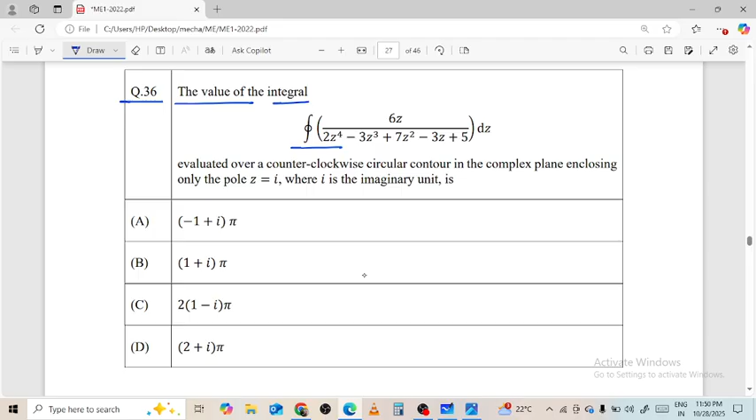ये रहा गेट 2022। The value of the integral, cyclic integral over 6z, 2z^4 minus 3z cube plus 7z square minus 3z plus 5 dz, evaluated over a counterclockwise circular contour in the complex plane enclosing the pole, of z is equal to I, an imaginary unit.

So shall we proceed and go ahead? Here we have the equation in the form of f(z), which is given that 2z^4 minus 3z cube plus 7z square minus 3z plus 5. That is the equation. Put the value over here, which is z is equal to I.

So f of I value is 2 times of I raised to power 4 minus 3I cube plus 7 times of I square minus 3 times of I plus 5. After calculating this, we get 2 plus 3I minus 7 minus 3I plus 5. The whole value is equated to 0, क्योंकि दो सब जो है कट पड़ जाएगा, 7, 5, 2, 7, which tends to be 0.

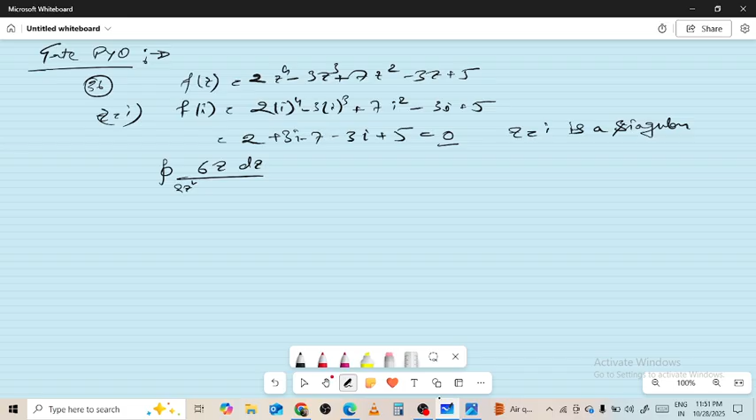तो एट z इज इक्वल टू I पे हमें फंक्शन कैसा प्राप्त होता है, इज अ सिंगुलर फंक्शन। Now we have the equations over cyclic integral over 6z dz upon 2z^4 minus 3z cube plus 7z square minus 3z plus 5, which is multiplied with 2 pi I over residue z is equal to I over here.

Now moving ahead, for this rule we have multiplied with the zi over here on that particular node. So residue over z is equal to I is equal to limit z tends to I, 6z divided over 2z^4 minus 3z cube plus 7z square minus 3z plus 5.

तो अभी अगर z इज इक्वल टू आई रखते हैं तो 0/0 फॉर्म होगा। तो हम यहाँ पे अप्लाई कर देंगे एल हॉस्पिटल्स रूल।

We have to apply L'Hopital's rule on the equation over here. z tends to I, 6z square minus 6zi over division 8z cube minus 9z square plus 14z minus 3.

Put the value over z is equal to I over here. Put the limit, 12I minus 6I division over 8I cube minus 9I square plus 14I minus 3. So after this we get the value, putting I upon 1 plus I.

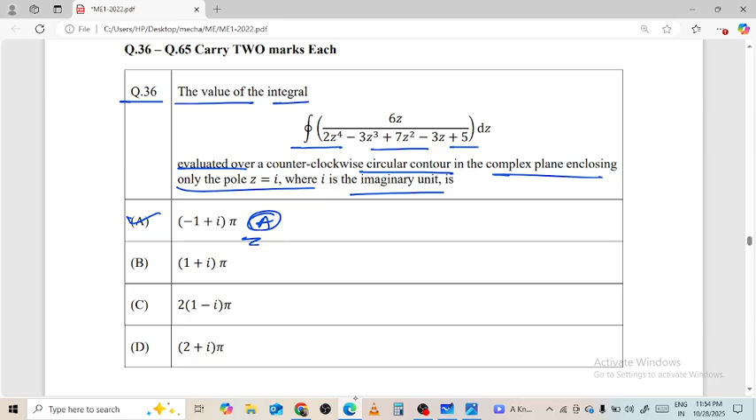Okay, so which of the choice is to be true over here? It's option alpha, right? Imaginary unit का बोल रहा है on that particular case over here।

Now moving ahead for the next question, easy peasy। Here the section दिया हुआ है, उस पे एक point load एक्सियल डायरेक्शन में लग रहा है। Let's consider an L-shaped elastic member ABC with slender arms AB and BC। ये जो आपका शेप दिख रही है बार की, वो उसी की बात कर रहा है। Uniform cross section is clamped at end A and connected to a pin at end C।

The pin remains in continuous contact and is constrained to move in a smooth horizontal slot। The section modulus of the member is same in both arms। The end C is subjected to a horizontal force P, and all deflections are in the plane of the figure। Given that the length AB is 4A and BC is A, the magnitude and direction of normal force on the pin from the slot respectively are, which of these is true over here?

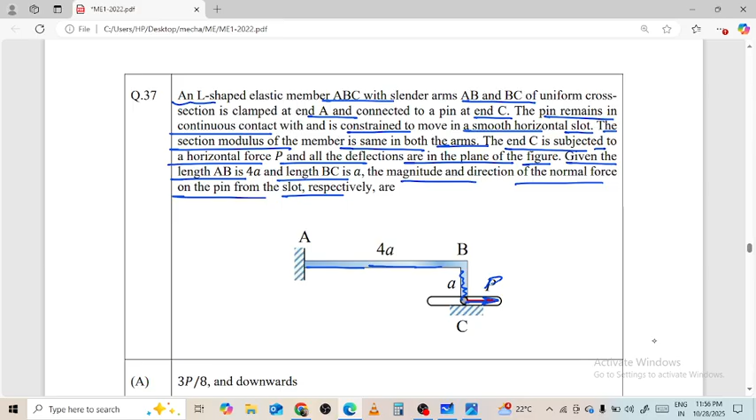अब हमको पता है कि एक फोर्स आएगा, एक लोड आएगा, फोर्स और लोड का ही कॉम्बिनेशन आपको चेक करना है। यहाँ पे नॉर्मली आपका एक्सियल लोड क्या लग रहा है P, और वर्टिकल कौन सा फोर्स F लग रहा है। ऑलराइट, नाउ मूविंग अहेड फॉर दिस।

अगर हम इसे शिफ्ट करके अपने बीम के ऊपर लेके आते हैं, तो अगर मुझे कैंटिलीवर बनाना है तो यहाँ पे एक पॉइंट लोड शिफ्ट करेंगे तो एक फोर्स के साथ मोमेंट भी दिखेगा, जो कि एक pa डिस्टेंस पे होगा। फोर्स को शिफ्ट करते हैं तो एक लोड और एक मोमेंट आता है।

नाउ ऑन दैट पर्टिकुलर नोड अगर मैं डिफ्लेक्शन कैलकुलेट करता हूँ, तो डेल वन इज इक्वल टू पॉइंट लोड के कारण, यहाँ पे Pa4 square upon 2EI कंसिडर एज अ मोमेंट के कारण। यहाँ पे हमें प्राप्त होता है 8Pa cube upon EI, और डेल टू अगर मैं डिफ्लेक्शन कैलकुलेट करता हूँ द पॉइंट लोड के कारण, तो मुझे प्राप्त होता है F times of 4a cube upon 3EI, which is to be 64Fa cube by 3EI.

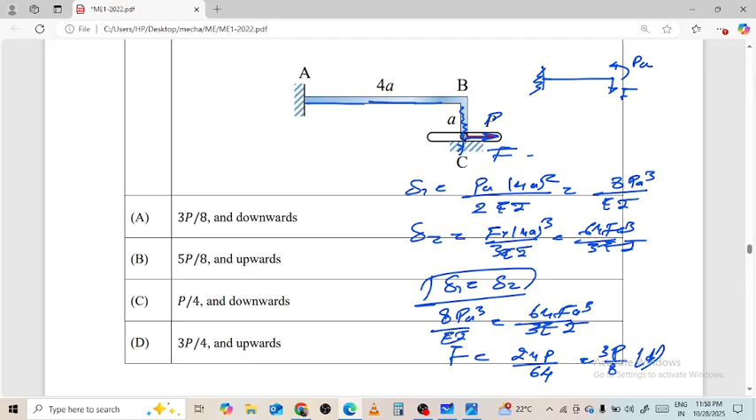Now I will go ahead with equations, is to be completely balanced. So point load जो है moment को balance कर रहा है on that particular node. 8Pa cube by EI is equal to 64Fa cube over 3EI. The final value we get for F is equal to 24P by 64, which is to be 3 times of P by 8. The action is to be in a downward direction. Option A is the right choice for this.

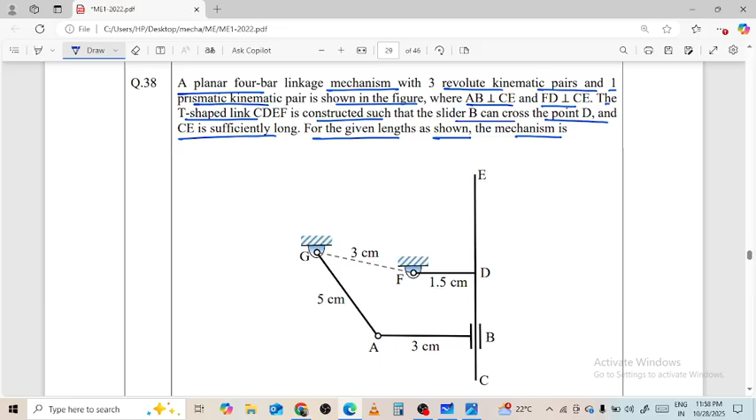Alpha. Now moving ahead for the next question. Here we have a planar 4 bar linkage mechanism with 3 revolute kinematic pairs and 1 prismatic kinematic pair as shown in figure. AB is perpendicular to CE and FD is perpendicular to CE. The T-shaped link CDEF is constructed such that slider B can cross point D, and CE is sufficiently long for the given length as shown. The mechanism has lengths 3, 5 centimeter, 1.5 and 3.

अगर मैं यहाँ पे डायरेक्टली ग्रेशॉफ लॉ लगाता हूँ तो वहां से समझ में आ जाएगा कि चेन कैसी है आपके। यहाँ पे शॉर्टेस्ट लिंक की लेंथ 1.5 सेंटीमीटर, 5 सेंटीमीटर। शॉर्टेस्ट प्लस लॉन्गेस्ट 1.5 plus 5 is equal to 6.5। and the remaining two links is to be P plus Q, 3 plus 3 is 6।

तो यहाँ पे आपको शॉर्टेस्ट प्लस लॉन्गेस्ट जो है मोर देन p प्लस q दिख रहा है। So on that particular node, what we have is there's a non-Grashof chain with an oscillating link. So it's B, B is the right option for this. Now moving ahead for the next.

Here we have a question over here. Consider a single degree of freedom system governed by x double dot t plus 2 zeta omega n x dot t plus omega n square x t equal to omega n square cos omega t, where zeta and omega n are the damping ratio and undamped natural frequency of the system respectively, while omega is the forcing frequency.

Amplitude of the forced steady state response of this system is given by 1 minus r square whole square plus 2 zeta r whole square raised to power minus 1 by 2, where r is equal to omega by omega n. The peak amplitude for this response occurs at frequency omega equal to omega p. Omega d denotes the damped natural frequency of the system. Which of the following is true? Alpha, beta, Charlie and delta. कौन सा स्टेटमेंट आपका जस्टिफाइबल होगा वही आपको बताना है अकॉर्डिंग टू दैट।

ओके, सो लेट्स वी हैव टू मूव ओवर हियर। हमें पता है कि एम्पलीट्यूड क्या होता है, स्क्वायर रूट ओवर 1 माइनस ओमेगा बाई ओमेगा एन को r square से डिनोट किया गया है प्लस 2 zeta times r का whole square। ऑलराइट, सो यहाँ पे हमें damping is to be square root of 1 minus zeta square times of omega n, which is less than the value of omega n.

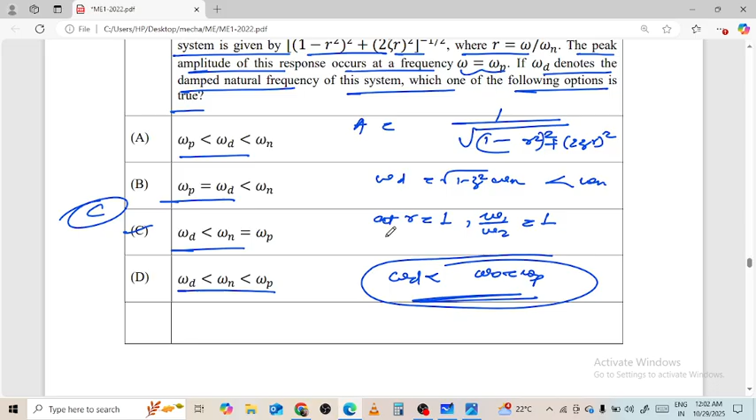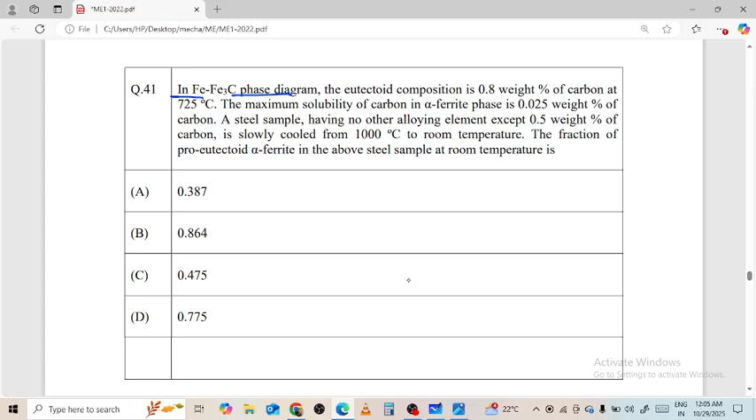Now moving ahead for the next question, a beautiful material science question. In an iron carbon phase diagram Fe-Fe3C, the eutectoid composition is 0.8% carbon at 725 degrees Celsius. Maximum solubility of carbon in alpha ferrite phase is 0.025 weight% carbon. A steel sample having no other alloying element except 0.5 weight% carbon, slowly cooled from 1000 degrees Celsius to room temperature.

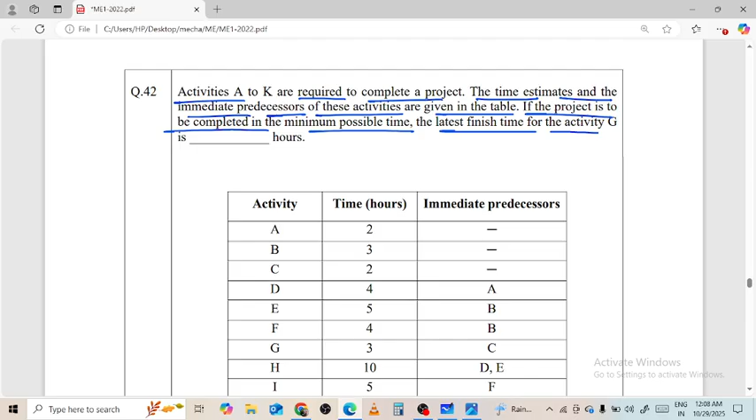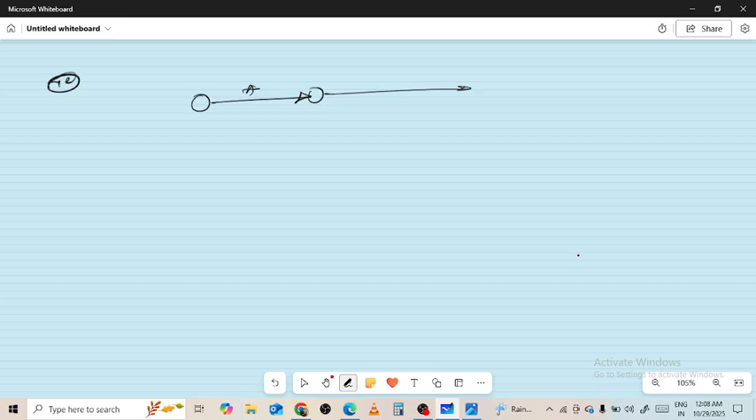So here we take a blank page for our question. The question number here is 42. We make sure activity A is moving, then it surpasses with A to D, Dehradun. Single node is the second activity B, and the third activity on this node is C.

Now moving ahead with the activity from the B point to activities E and F. It's E, and over it is F. Then F to I over here.

The activity over here is to be H. Now from C, the activity is to be G, and after G connecting the dots over here to be here. I is to be J. Now the final activity is to be K over here.

Alright, now putting the values over here. A is to be 2, B is to be 3, C is to be 2, D is to be 4, E is to be 5, F is to be 4, G is to be 3, H is to be 10, I is 5, J is to be 8, and K is to be 3.

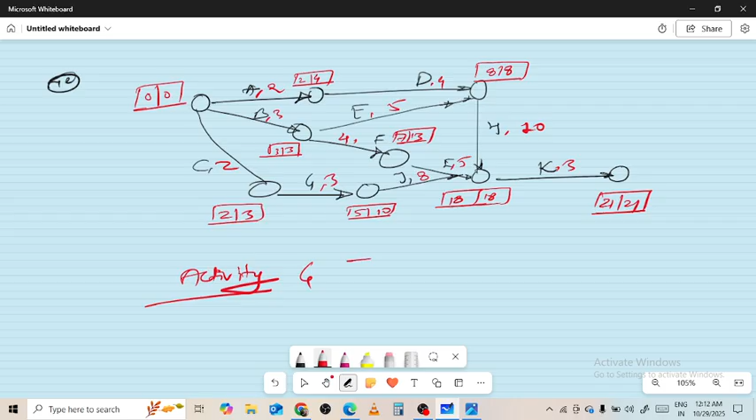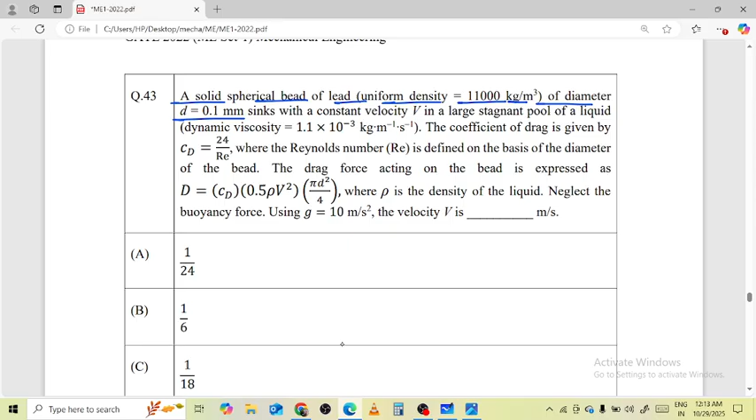The 43rd question states: a solid spherical bead of lead with uniform density equal to 11,000 kg per meter cube, of diameter D 0.1 millimeter, sinks with a constant velocity v in a large stagnant pool of liquid with dynamic viscosity 1.1 into 10 raised to power minus 3 kilogram per meter per second. Coefficient of drag is given by CD equals 24 by Reynolds, where the Reynolds number is defined on the basis of diameter of the bead. Drag force acting on the bead is expressed as D equals CD times 0.5 rho v square pi by 4 times D square, where rho is the density of liquid; neglect the buoyancy force. G is to be 10 meter per second square.

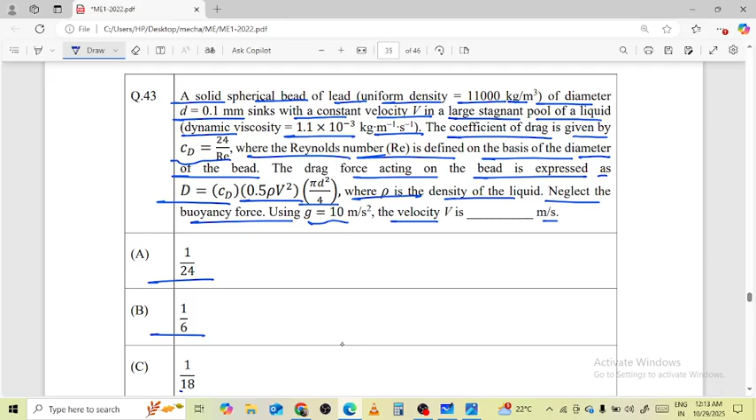We know Reynolds number is equal to rho v D upon mu. Putting the values over here: rho v, 0.1 into 10 raised to power minus 3 upon 1.1 into 10 raised to power minus 3. So Reynolds is equal to rho v upon 11.

Drag force on a sphere, which is to be CD times 0.5 times rho v square pi by 4 d square. Now putting the values for coefficient of drag: 24 upon rho v, by 11 into 0.5 rho v square into pi by 4 d square.

So the value of drag is to be 132 v pi by 4 times d square.

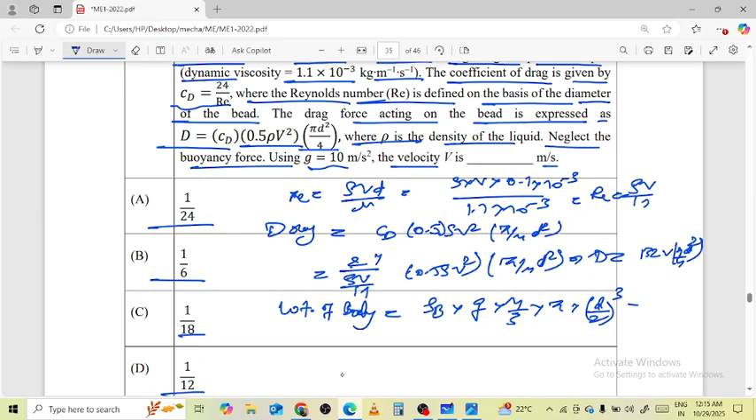Now for comparison, weight of body is equal to drag force, which is rho body g volume 4 by 3 pi r cube. On that note, net force on the body is to be 0 in the case of constant velocity. So comparing: 132v by 5 D square is equal to rho of body g, 4 third into pi D by 2 cubed.

Okay, now moving ahead for the next question over here.

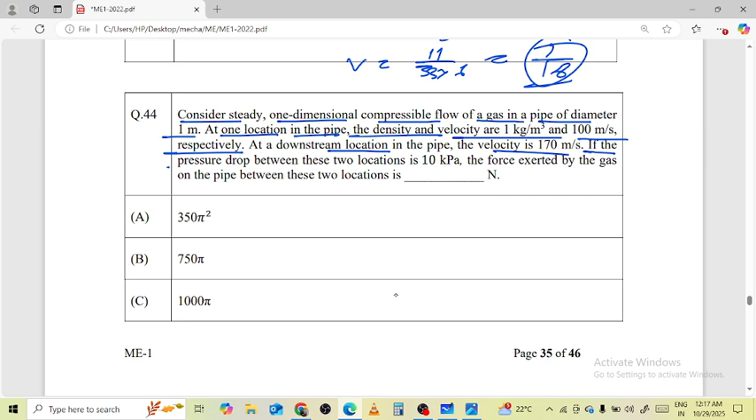Consider a steady one-dimensional compressible flow of a gas in a pipe of diameter 1 meter. At one location in the pipe, the density and velocity are 1 kg per meter cube and 100 meter per second respectively. At a downstream location in the pipe, velocity is 170 meter per second, and the pressure drop between these two locations is 10 kilopascal. Force exerted by the gas on the pipe between these two locations is in Newton: options are 350 pi square, 750 pi, 1000 pi, and 3000. Which of the options is true over here?

So let's make the diameter of the duct over here. Diameter is 1 meter, velocity v1 is 100 meters per second, and v2 is 170 meters per second. So we apply the momentum equation. There are two faces between them: this one going in, and this one going out. This is our section 1 to 2.

On that particular node we have P1 minus P2 times A, minus the force in the particular region, which is to be F.

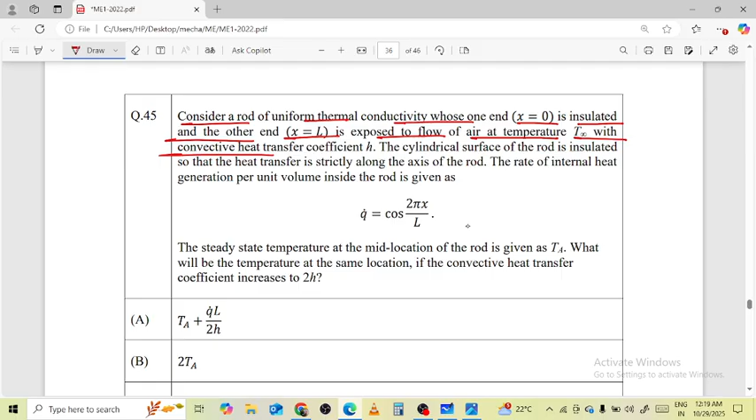Consider a rod of uniform thermal conductivity whose one end at x equals 0 is insulated and the other end at x equals L is exposed to flow of air at temperature T infinity with convective heat transfer coefficient H. The cylindrical surface of the rod is insulated so that heat transfer is strictly along the axis of the rod. Rate of internal heat generation per unit volume inside the rod is given as Q dot cos of 2 pi x by L. Steady state temperature at the mid location of the rod is given as Ta.

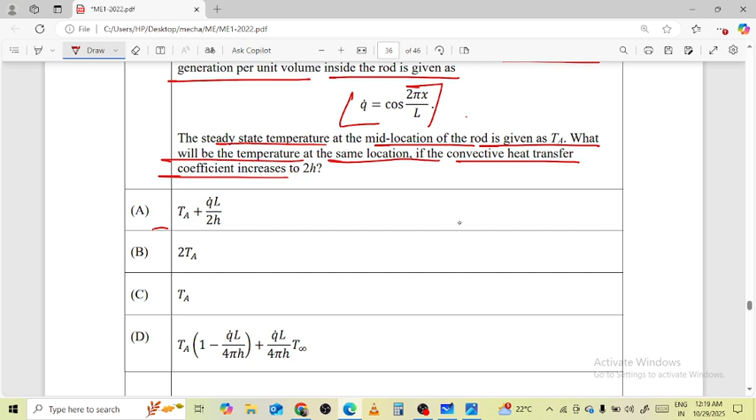What will be the temperature at the same location if the convective heat transfer coefficient increases to 2H? Options include Ta Q dot L by 2H, 2Ta, Ta times 1 minus Q dot L by 4 pi H, plus Q dot L by 4 pi H T infinity. So after solving, we have to get the complete equation as well as the scenario. Let's take a blank page for our calculation.

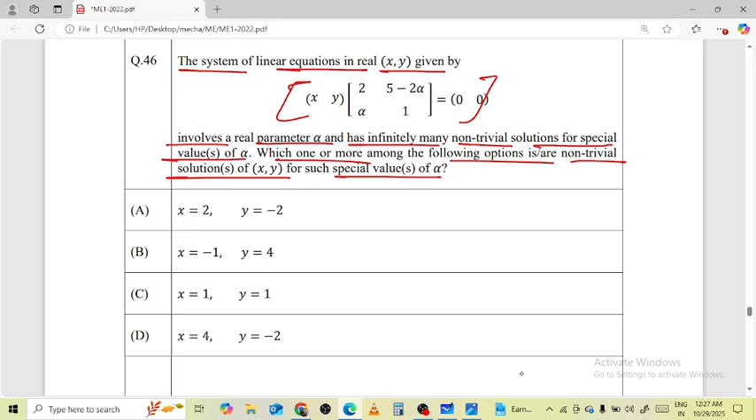So if it says non-trivial, the condition is determinant A is equal to 0. Put the value over here.

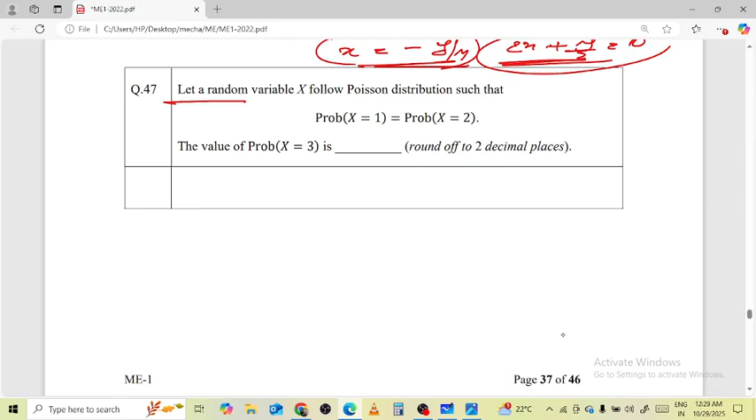Question number 47: let a random variable x follow the Poisson distribution such that probability x is equal to 1 is equal to probability x is equal to 2. The value of probability x is 3, round off to 2 decimal places.

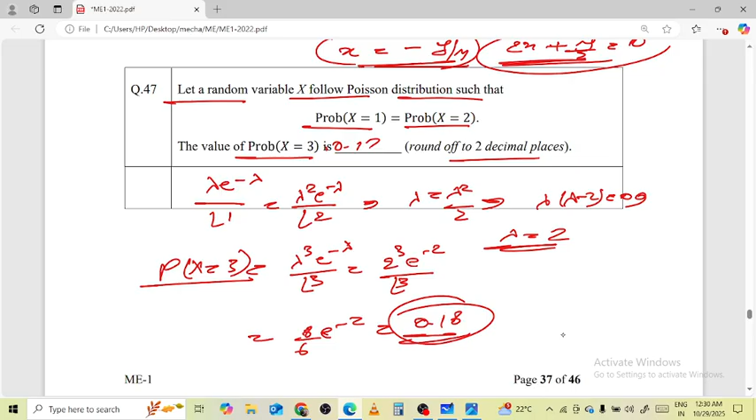That gives 8 by 6, e to the power minus 2. So the final value comes out to be 0.18. Such a beautiful and classical question from the distribution part is completed over here.

Now moving ahead for the next question, 48. Consider two vectors A and B.

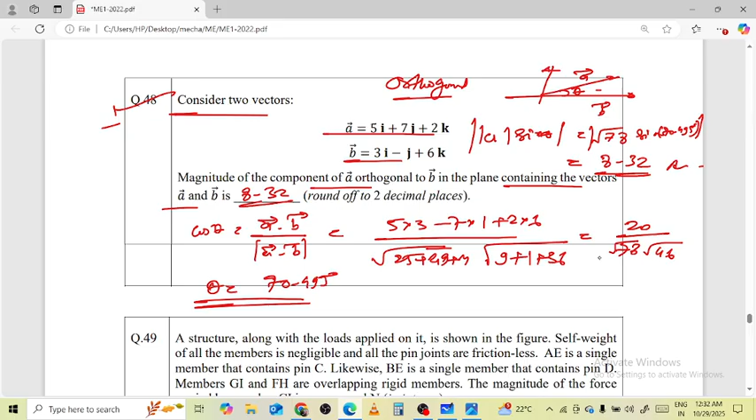The final value comes out to be 8.32. Okay, so let's move ahead to the next easy peasy question.

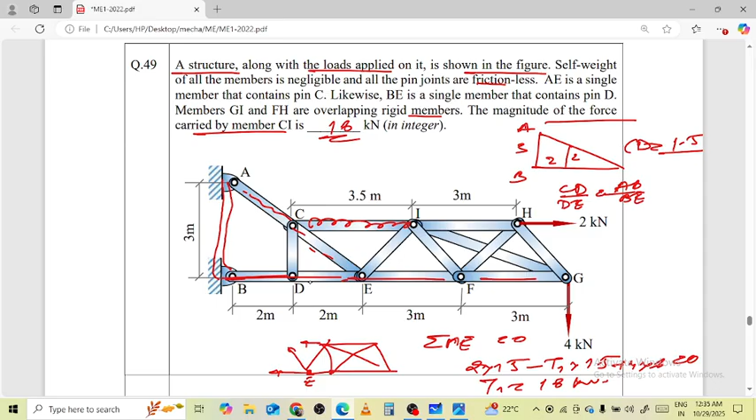Alright, easy peasy. Now next question, question number 50.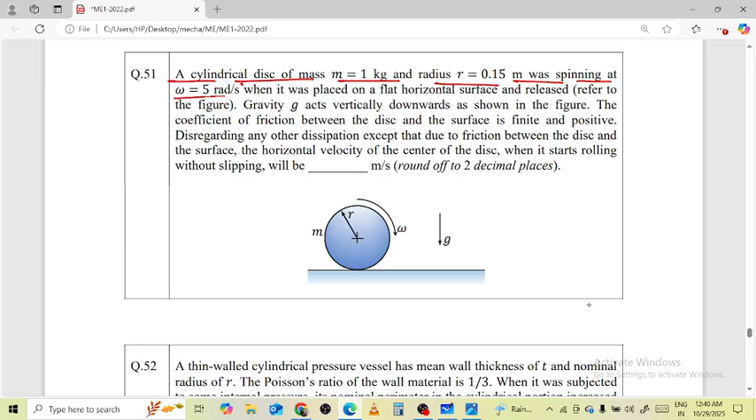Easy, very much. Now we have the next question, number 51. A cylindrical disk of mass m = 1 kg, radius r = 0.15 meter, was spinning at omega = 5 radians per second when it was placed on a flat horizontal surface and released, as shown in the figure. Gravity g acts vertically downward as shown. The coefficient of friction between the disk and the surface is finite and positive, disregarding any other dissipation except that due to friction between the disk and the surface. The horizontal velocity of the center of the disk when it starts rolling without slipping will be, in meters per second, which of the options alpha, beta, charlie, delta is true?

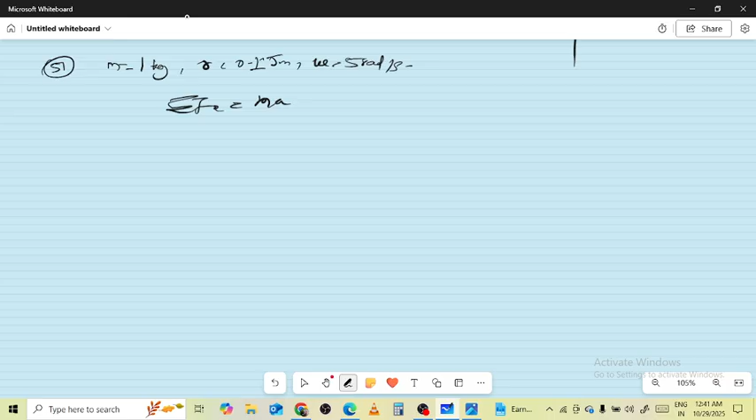The radial force is m*r*alpha by 2. So ma is equal to m*r*alpha by 2. From here the acceleration value is r*alpha upon...

Now when rolling starts, v equals omega times r; the condition here is v equals r*omega. Now v = u + at from Newton's equation, and omega dash equals omega minus alpha*t. So v equals 0 plus at, or r times (omega minus alpha*t) equation. So at value equals r*omega minus alpha*t*r. So alpha*t equals 2*omega upon 3. Easy.

From the equation v equals r times (omega minus alpha*t), substituting gives r*omega upon 3: 0.15 into 5 upon 3, the complete value is 0.25 meters per second. Easy, 0.25.

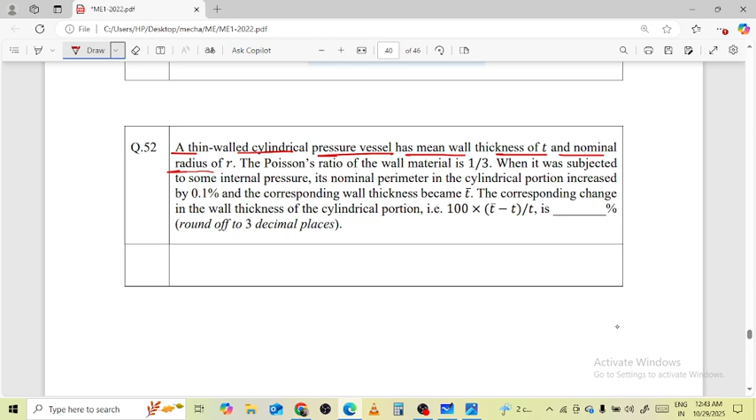For the next question: a thin walled cylindrical pressure vessel has a mean wall thickness of t, nominal radius of r, Poisson's ratio of the wall is 1 by 3. When subjected to internal pressure, its nominal perimeter in the cylindrical portion increased by 0.1%. Corresponding wall thickness became T bar. We need to find the corresponding change in wall thickness of the cylindrical portion, 100 into (T bar minus T) upon T, in percentage.

We know hoop strain relates to diameter, so sigma x by E minus mu times sigma longitudinal by E. On that note, sigma hoop is PD by 2t, and longitudinal sigma is hoop by 2. After that, epsilon hoop is equal to PD by 4tE, 2 minus mu.

0.1 upon 100 equals that, and epsilon 3 in the radial direction gives del T by T. So sigma 3 by E minus mu by E sigma 1 minus mu sigma 2 by E, giving epsilon r as del T by T. Over here the value comes to minus 3 mu PD by 4tE.

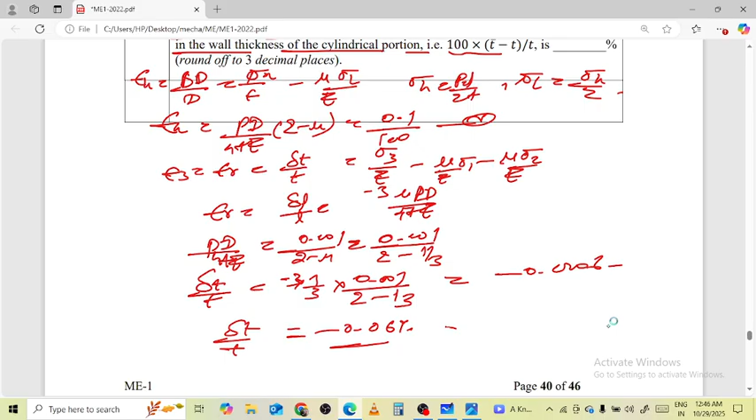Easy as that. Now moving ahead to the next question.

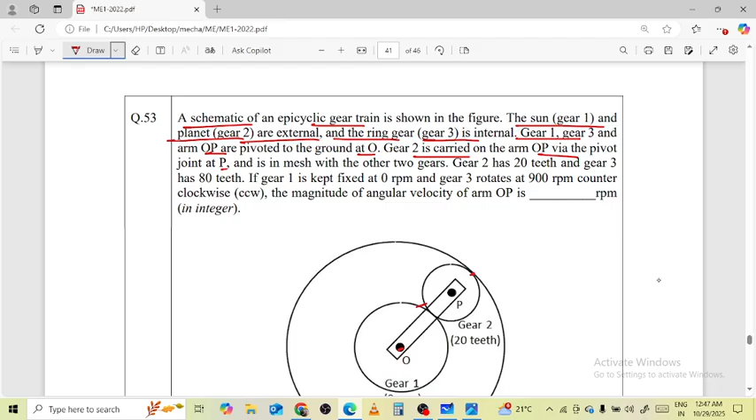Gear 1, 3 and arm OP are pivoted at ground O, meaning the origin point. Gear 2 is carried on the arm OP via pivot joint P and meshes with the other two gears. Gear 2 has 20 teeth, gear 3 has 80 teeth, and gear 1 is kept fixed at 0 rpm.

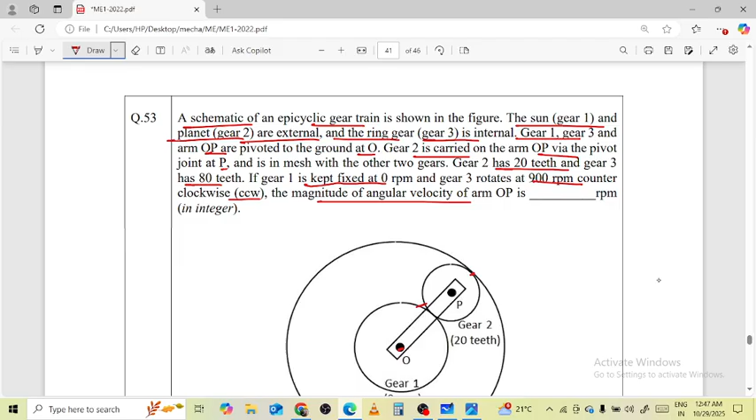Moving ahead with our diagram. Here we are on number 53. So here the T2 value is 20, T3 is 80, and T1 is what we need to find.

That is the ask. We know in the gear train condition, R1 plus 2 times R2 equals R3, in the sun and planet case. So on that note, T1 plus 2 times T2 is equal to T3. This implies T1 equals 80 minus 2 times 20, which is 40.

Here we have some conditions: arm, gear 1, gear 2 and gear 3. So here the motion which we have to constrain is given over here. Now the first one, the arm.

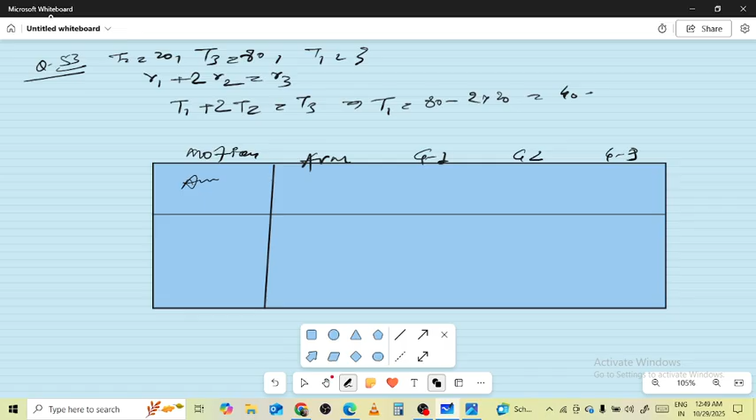For x rotation clockwise: 0 plus x, then minus x into 40 by 20, and minus x into 40 by 20 into 20 by 80. Now we'll consider the arm effect.

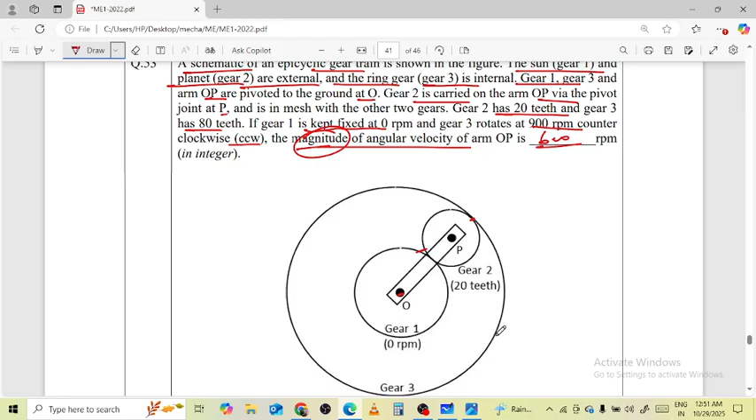Over here x is equal to 600 rpm, and y is equal to 600. So the final value taken for the arm is 600 rpm. Since magnitude is asked, no sign will come into the answer. The x and y values are calculated, easy, not too difficult.

Now next question: here under an orthogonal cutting condition, a turning operation is carried out on a metallic workpiece at a cutting speed of 4 meter per second. Orthogonal rake angle of cutting tool is 5 degree. Uncut chip thickness and width of cut are 0.2 and 3 mm respectively. In the turning operation, resulting friction angle and shear angle are 45 and 25 degree respectively.

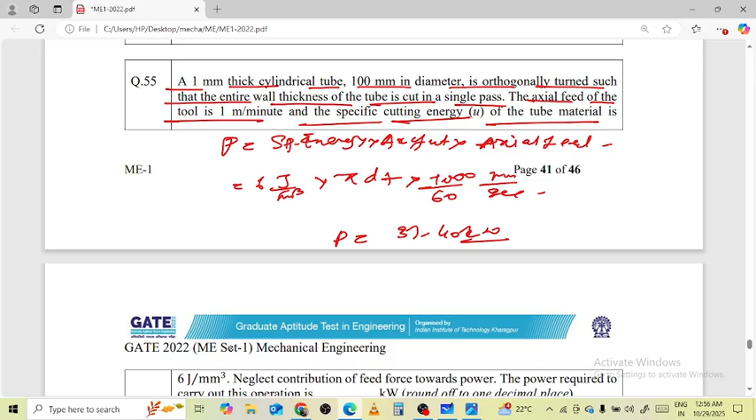Power will be 31.40 kilowatt. The data given says to neglect the contribution of feed force towards the power required to carry out the operation.

Next question on our screen.

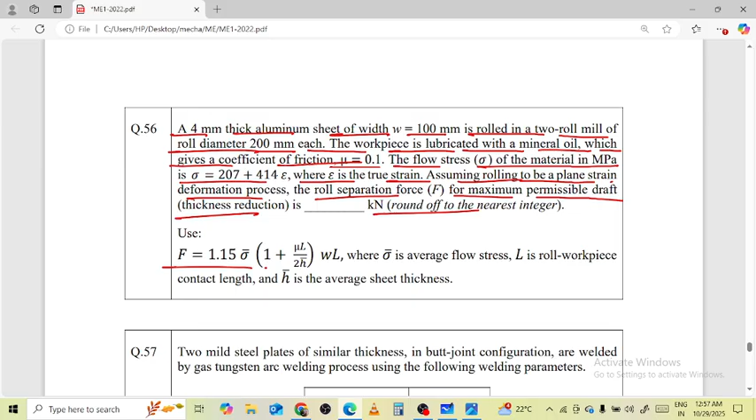A 4 millimeter thick aluminum sheet of width 100 millimeter is rolled in a two roll mill of roll diameter 200 millimeter each. Workpiece is lubricated with mineral oil, giving a coefficient of friction 0.1. Flow stress of material is sigma equals 207 plus 414 epsilon megapascal, where epsilon is true strain, assuming rolling to be a plane strain deformation process. Roll separation force F for maximum permissible draft thickness reduction in kilonewton: the condition is F equals 1.15 sigma bar times 1 plus mu L by 2h bar, times W L, where sigma bar is average flow stress, L is roll-workpiece contact length, and h bar is average sheet thickness. Let's try to solve it.

So here the condition given is F equals 1.15 sigma bar, 1 plus mu L upon 2h bar, W L. mu square R equals delta H maximum, which is H naught minus H F, equals mu square into R, that is 0.1 square into 100. So H naught minus HF equals 1, HF equals 3 millimeter, since H naught given is 4 millimeter.

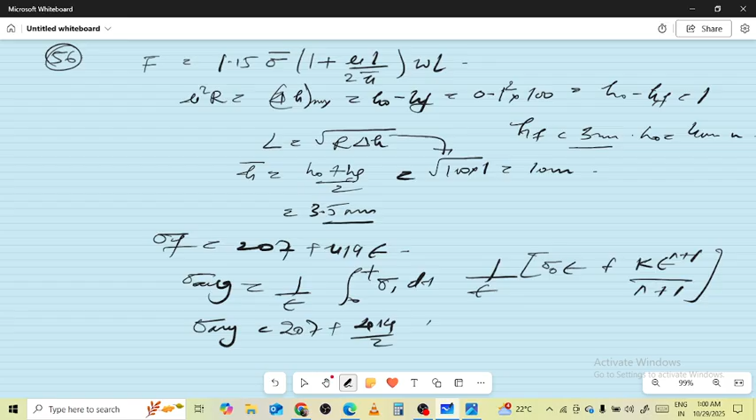Now, the total average we will get is 207 plus 414 upon 2, epsilon being the equivalent true strain, epsilon equals log of h naught upon hf, which equals log of 4 by 3, equals 0.2876.

Putting the value in sigma average: sigma average equals sigma bar, 207 plus 414 upon 2, times 0.2876, equals 266.53 megapascal.

Now put the value in force F: 1.15 into 266.53 into 1 plus 0.1 into 10 upon 2 into 3.5, into 100 multiplied with width and length. So the final value is 351 kilonewton.

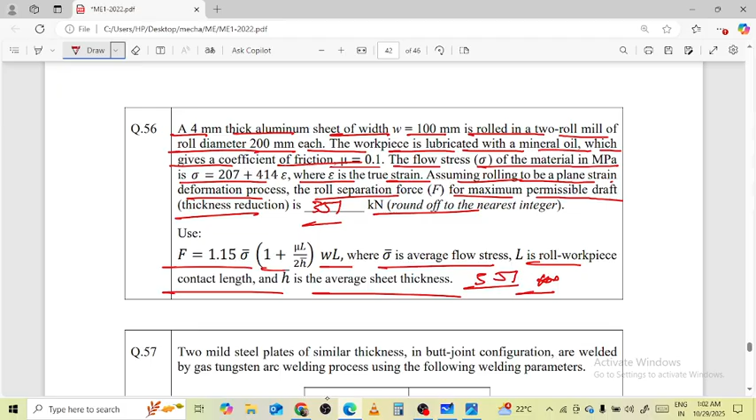Question number 57. Two mild steel plates of similar thickness in butt joint configuration are welded by a gas tungsten arc welding process using the following welding parameters: welding voltage 20 volt, current 150 ampere, and welding speed 5 millimeter per second. Filler wire of the same mild steel material having 3 millimeter diameter is used in the welding process.

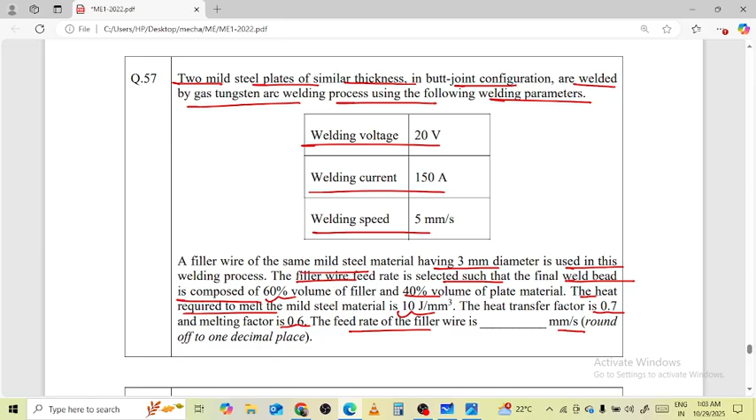Filler wire feed rate is selected such that the final weld bead is composed of 60% volume of filler and 40% volume of plate material. Heat required to melt the mild steel material is 10 joule per millimeter cube. Heat transfer factor is 0.7 and melting factor is 0.6. Find the feed rate of the wire in millimeter per second. Let's try to solve it down.

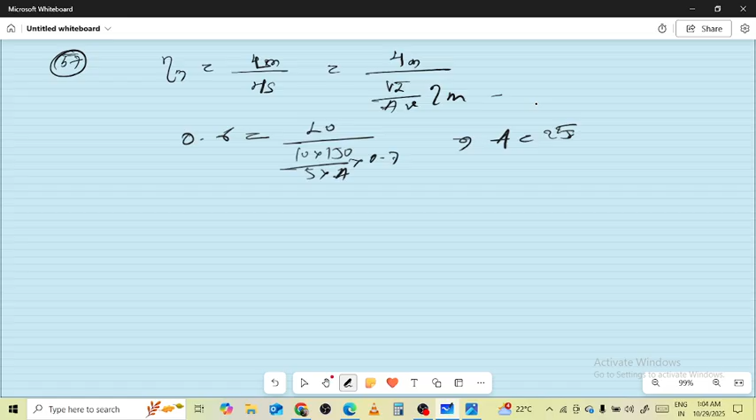Okay, here the efficiency over melting, heat melting divided by heat supply, HM melting by VI upon AV. Efficiency of melting is 0.6 equals 10 upon 20 into 150 upon 5 into A into 0.7. So the value of area comes out to 25.2 millimeter square.

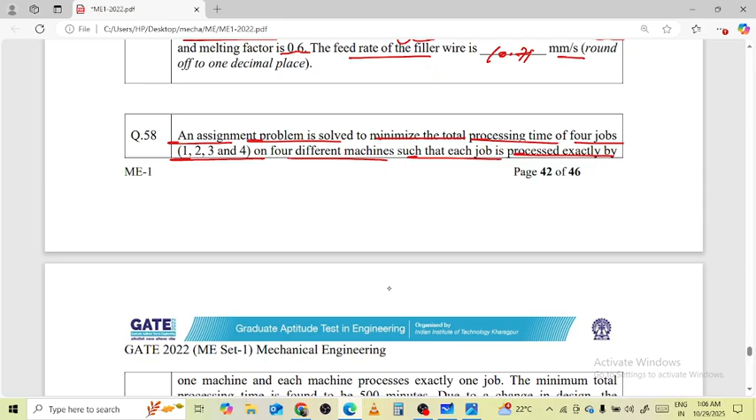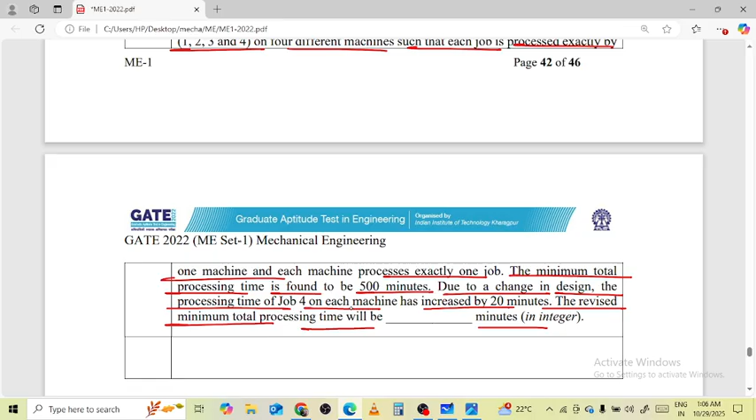An assignment problem is solved to minimize the total processing time for 4 jobs on 4 different machines such that each job is processed exactly by one machine and each machine processes exactly one job. The minimal total processing time is found to be 500 minutes. Due to a change in design, processing time of job 4 on each machine has increased by 20 minutes. The revised minimum total processing time will be in minutes, is to be found. It's very easy, don't overthink it. So here minimum total processing time will become 500 and extra is 20, so 520. Tell me, can such a small easy question ever be asked? It has been asked, indeed. Okay.

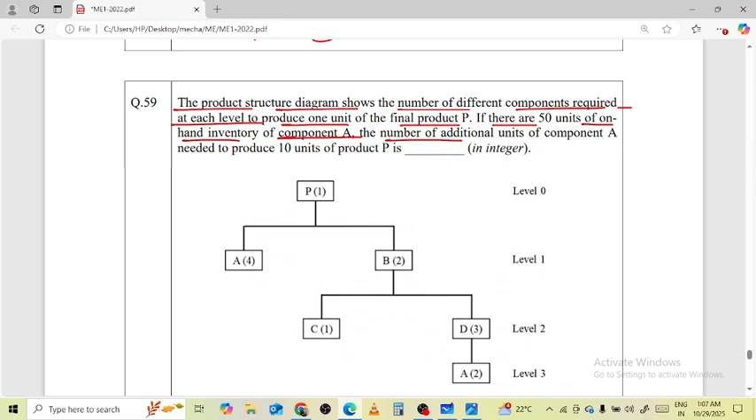Now there's a tree diagram question from Industrial Engineering. The product structure diagram as shown has different components required at each level to produce 1 unit of final product P. If there are 50 units on hand inventory of component A, find the number of additional units of component A needed to produce 10 units of product.

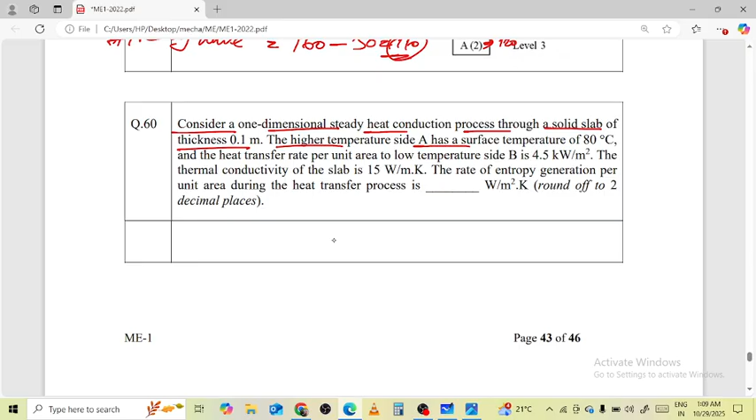Here's the screen. Consider a one dimensional steady heat conduction process through a solid slab of thickness 0.1 meter. High temperature side surface temperature is 80 degrees Celsius. Heat transfer rate per unit area to the low temperature side is 4.5 kilowatt per meter square. Thermal conductivity of slab is 15 watt per meter Kelvin. Rate of entropy generation per unit area during the heat transfer process is to be found.

Okay, so Q is equal to minus K dt by dx, this we know from the conduction equation. Put the value: 4500 equals 15 into 1, 353 minus T2, on 0.1. T2 value comes out to be 323 Kelvin.

Now here we need to see the case of entropy generation. So ds by dt at control volume Si minus Se plus whatever entropy is being generated in the control volume will be zero. So generation is equal to q by T minus q by T inside. Here the value of q is 4500 upon 323 minus 4500 upon 353. The final value comes out to be 1.184 watt per meter square K.

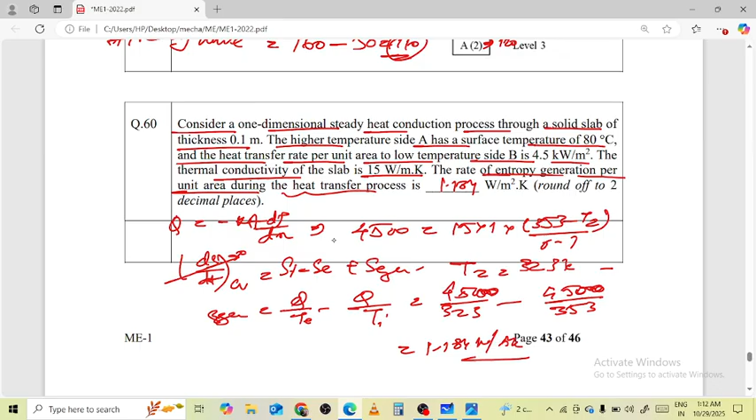Okay, now moving ahead for an easy peasy next question, number 61. In a steam power plant based on a Rankine cycle, steam is initially expanded in a high pressure turbine, then reheated, and finally expanded in a low pressure turbine. Expansion work in the high pressure turbine is 400 kilojoule per kilogram and in the low pressure turbine is 850 kilojoule per kilogram. Pump work is 15. The cycle efficiency is 32%. Heat rejected in the condenser is to be found, which is true here.

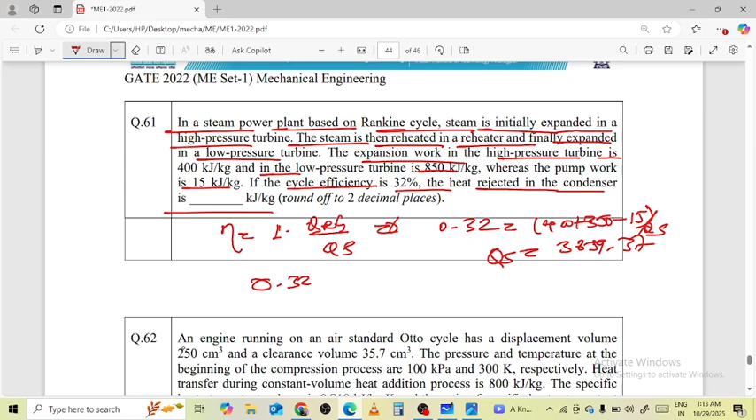We know that efficiency is 1 minus heat rejected by heat supply. Here heat rejected, if we see from here, is 0.32, and 400 plus 850 minus pump work 15 upon heat supply gives how much, buddy? 3859.37. Put all the values: 0.32 equals 1 minus heat rejected over 3859.37. The equivalent value comes out to 2624.37, that is the final answer in kilojoule per kilogram.

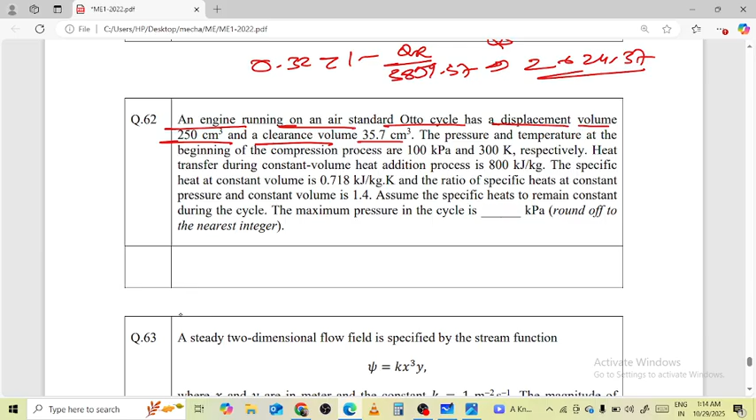All right, easy way, decent. Now question 62. An engine running on an air standard Otto cycle has a displacement volume of 250 centimeter cube, clearance 35.7 centimeter cube. Pressure and temperature at the beginning of the compression process are 100 and 300 respectively. Heat transfer during the constant volume heat addition process is 800 kilojoule per kilogram.

Specific heat at constant volume is 0.718 and remains the same. Cp and Cv remain constant during the cycle. We need to find the maximum pressure of the cycle for this air standard cycle. So let's draw the PV diagram here: 1, 2, 3, 4, okay.

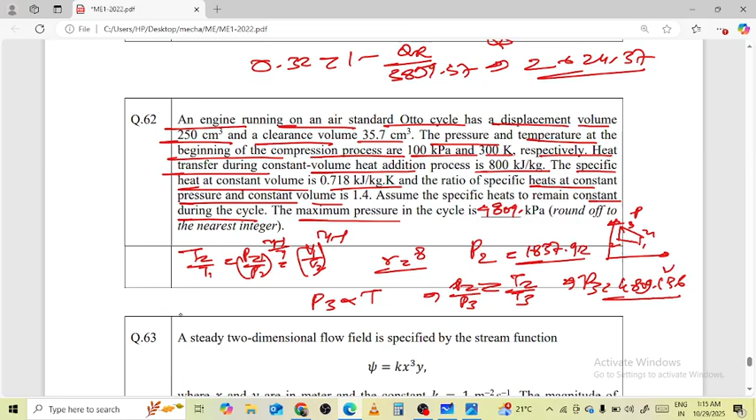Now question 63. A steady two-dimensional flow field is specified by psi equals kx cube y. X and y are in meter, k is in 1 per meter square per second. Find the magnitude of acceleration at x, y equal to 1 meter per second square.

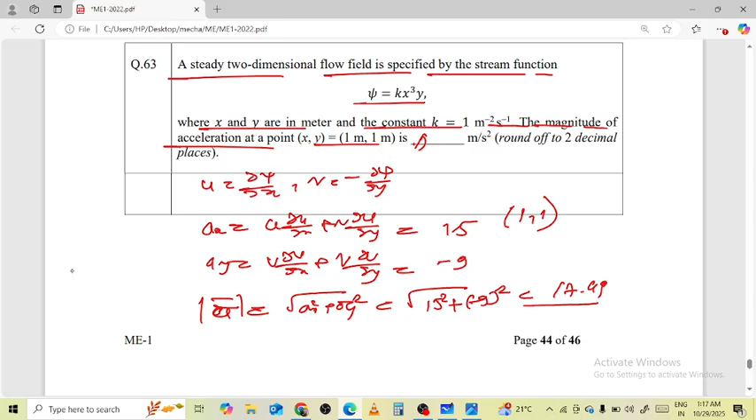Second last question of the day. Consider a solid slab, thermal conductivity 10 watt per meter inverse Kelvin inverse, thickness 0.2 meter, of infinite extent in the other two directions as shown in figure. Surface 2 is at 300 Kelvin, exposed to a fluid flow at a free stream temperature T infinity of 293 Kelvin, with a convective heat transfer coefficient of 100 watt per meter square Kelvin.

Surface 2 is opaque, diffuse and gray with an emissivity of 0.5, and exchanges heat by radiation with a very large surrounding at 0 Kelvin. Radiative heat transfer inside the solid slab is neglected. Stefan-Boltzmann constant is 5.67 times 10 raised to minus 8 watt per meter square Kelvin 4. We need to find temperature T1 of the surface of the slab under steady state condition.

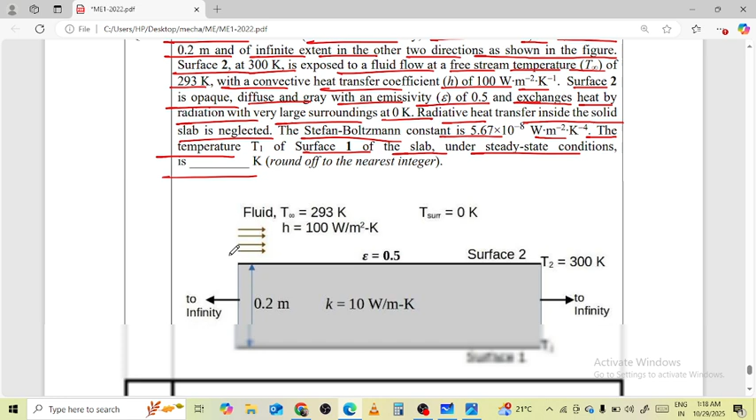So here, simply Q conduction should be equal to Q radiation plus Q convection. So the value of K times T1 minus T2 upon per unit length is equal to...

H into T2 minus T infinity for convection, plus emissivity 0.5 into 5.67 into 10 raised to minus 8 into 300 raised to power 4 minus 0 to the power 4.

Here K value is 10. T1 is unknown, T2 is 300, L is 0.2, H is 100, T2 is 300 and T infinity is 293. Putting in all the values, T1 comes to 318.59, and in the form of integer, 319 Kelvin is the final value. That's all, easy.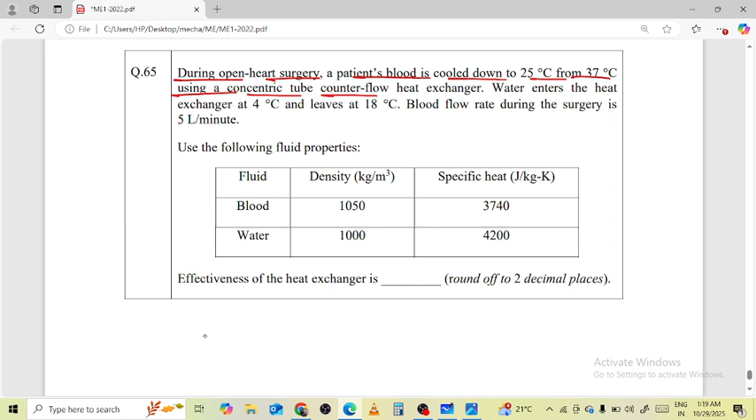Here we have the last question. During open heart surgery, a patient's blood is cooled down to 25 degree Celsius from 37 degree Celsius using a concentric tube counterflow heat exchanger. Water enters the exchanger at 4 degree Celsius to 18 degree Celsius. Blood flow rate is 5 liter per minute, using the properties of blood and water density and specific heat.